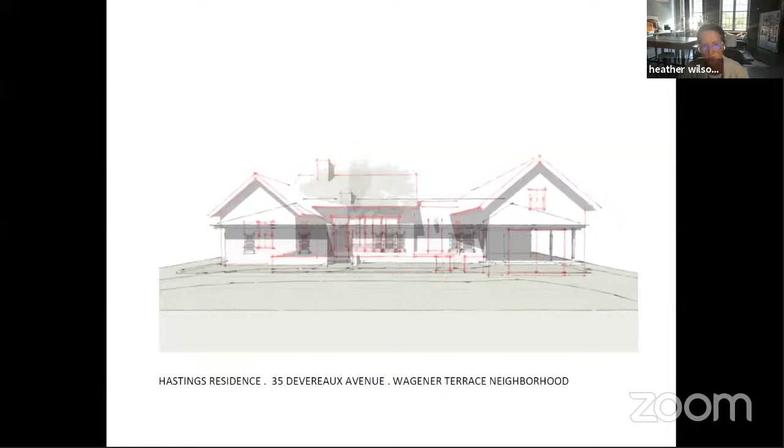I don't want to bore you by reading it, a lot of it I've touched on. But again, going back to that height - if we raise the floor inside, either to give it protection from grade as it is, regardless of flood, we're looking at a 7'9" ceiling height, and lifting that ceiling opens up that frieze and would create a condition where we would need to add brick to a brick wall. So in addition to the complexity structurally, I think architecturally it creates an odd condition of feathering in old brick on top of the existing brick.

And then some other issues which are pointed out in the structural engineer's letter. So I won't bore you with reading that, as I'm sure you have seen it and heard it. So we can keep going.

This is the water. This is, again, what I touched on already. It's in an unusual little island of an X zone adjacent to a V zone on the same property.

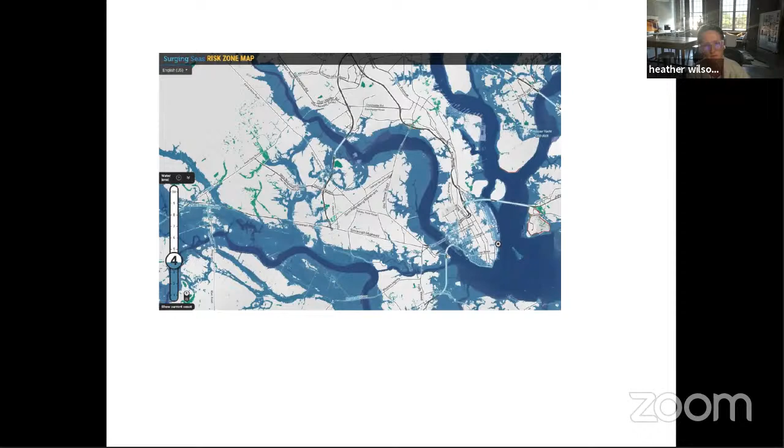You can go through these pretty quickly. This was just indicating what you all know and what we're all up against and struggling with here on the peninsula, so I won't keep going on.

And that's a diagram. That one's probably most material. If you could back up one, Kim, because if you look at the bottom of the existing house, that really shows what we're up against. The orange line in the existing section is what we were trying to achieve in order to protect it from the A zone.

And then the red line on the right is the minimum finish in the middle of the yard. So that kind of tells the story of what we're looking at, and at what point investing in the restoration makes sense. Now, in the proposed section, even though we don't plan to go all the way up, we're just looking for a few feet of protection from groundwater.

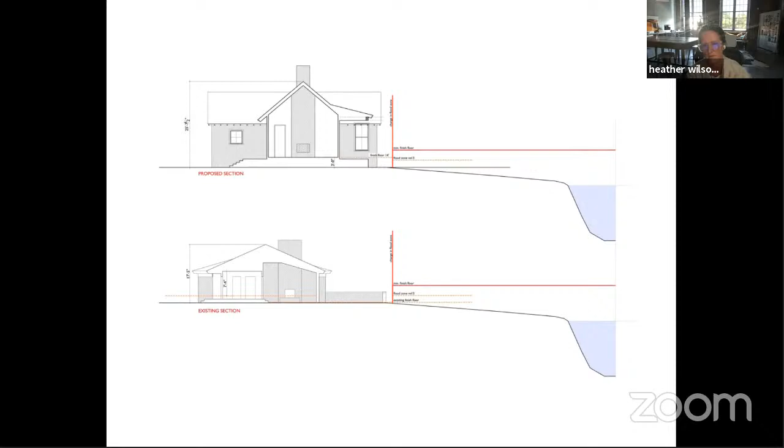These were just some neighborhood context pictures.

These are pictures, and I know you all saw them, so we can move through them, but this was just some of the damage that's happened to the house with the grade and the rain. It's splash, we know, but it's still significant because that is the sill into the finished floor of the house. So there's been a lot of deterioration.

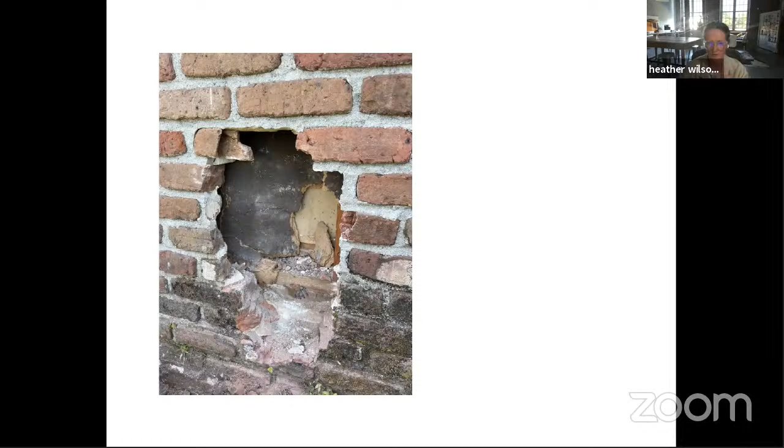That was where we did some excavating to determine the size of the footing, which is referenced in the engineer's letter, and then the sheathing that does not provide the shear, it's crumbling. Engineer's letter.

These were a few pictures just to show the range of homes that are in the area, and I know this isn't really part of your purview, but again, it's what we drew from, and also looking at what is very typical of the neighborhood in terms of the elevation relative to the street.

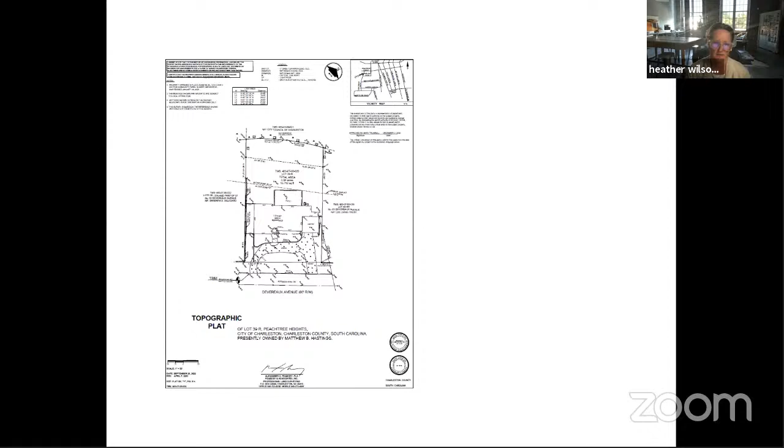Kim, I know you said you had to blaze through those, so that's fine. Heather, you've got about a minute left.

Just to, okay, well, this is how I finished. I was just trying to show that, without mimicking the original home, we are drawing from it in scale and design, and then again, salvaging that brick and reusing it just as they did 52 years ago. We wanted to honor the material and the home in that way.

You could probably leave it on either of those, as they're probably most material to the board's discussion. Those are the existing home.

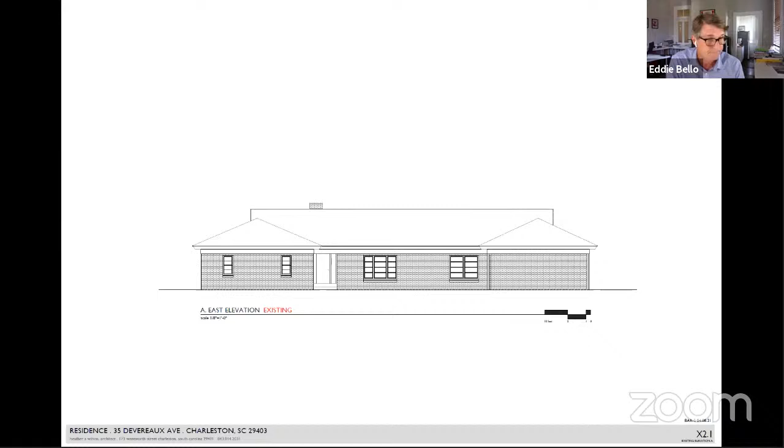Lindsay Van Slambrook. I'm on the fence as well, but leaning towards denial simply because of the cultural significance. And I think it's even perhaps more important in the current climate that we really look at structures like this. I understand that the architect - that may not be his best work - but something just doesn't feel right to me from a cultural significance standpoint, to tear down a house where a prominent African American had lived for many, many years.

And the architect was an African American architect. But I also see that this is not a great example of the architecture of that time, and perhaps the architect himself would say this was not his best work. So I'm struggling here, but leaning towards denial, really for this cultural significance.

This is Bill. I was not able to attend the site meeting this morning, I apologize for that. Like Eddie said, I also had the privilege of knowing Mr. DeCosta. I learned he actually consulted on some projects that I worked on, learned a lot from him. He was able to share some of his history of work in Charleston with a young intern at the time, and I did take a lot of what he said to heart and appreciated his input.

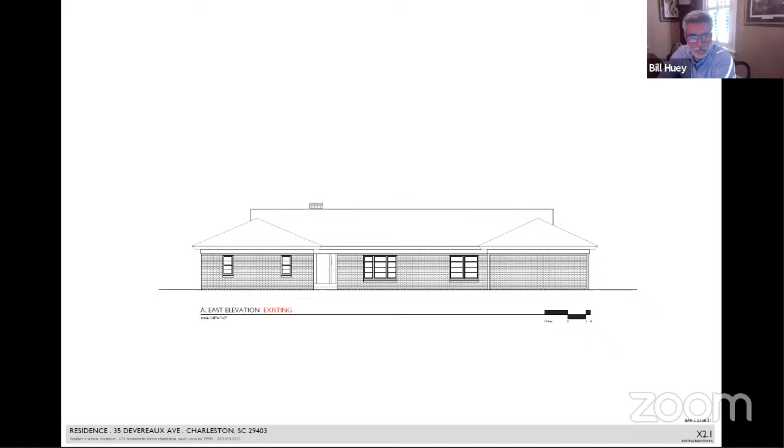My name's Hunter Kennedy, and I think I initially approached this house assuming I was not aware of the cultural value of the property, who built it, who lived there, when we made the site visit, and just judging it on its merits. I did not think it was an outstanding example of modernist architecture on the peninsula. I do think there's some issues in terms of the quality of construction. However, this is a really tough case. I've owned a house built by Herbert DeCosta Sr. I restored it, and I'm aware of his standing historically on this peninsula, what that family meant to architecture here. So I think it's a much more difficult decision.

So I'm considering maybe a deferral would be a better approach from my perspective in terms of making that decision on whether to approve a demolition, because I would need more time to study this.

One factor that I'm weighing is the fact that it is in an X zone. If it were not in an X zone, I think the prospect of elevating it would be pretty far-fetched, but the fact that it's already deemed safe plays into my thinking a little bit.

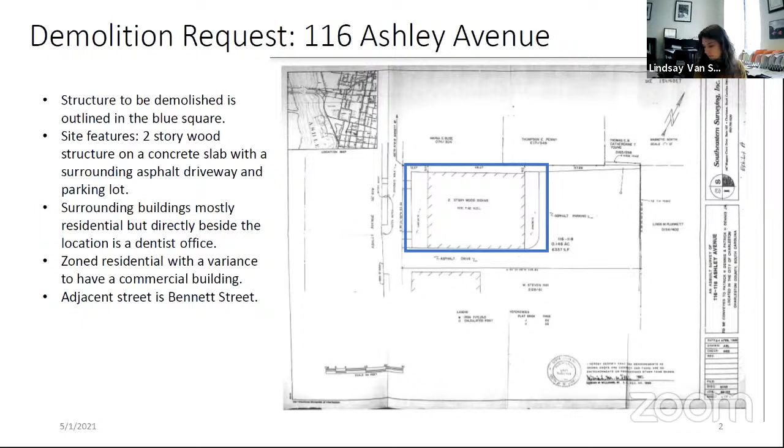As I mentioned earlier, most of the buildings around it, except for the one right next door, are residential homes that have been beautifully renovated. Right next door is another dentist office, zoned residential with a variance to have this commercial structure on it. The adjacent street to this one is Bennett Street. You can go to the next slide, please.

So this is the front elevation of the building. You can see it's quite dilapidated. It was a dentist office for many years, but it hasn't operated in 3 years. It was built in 1967. As I go through some of the other photos, you'll see the drywall has been removed at the base of each room because of previous flooding.

It's our perspective that this architecture does not render the character and charm defined by the traditional architecture of a Charleston residence and the houses around this structure. You can go to the next slide.

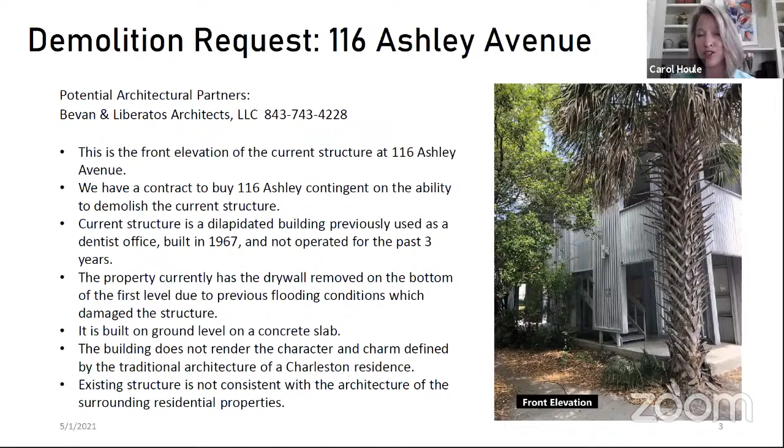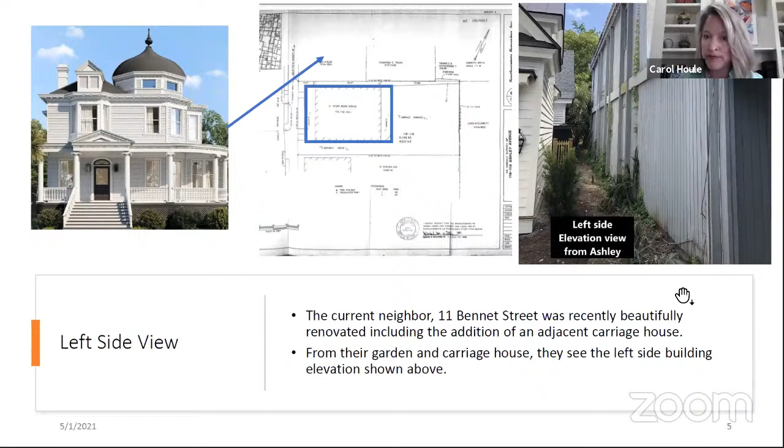So we'll walk down the street as if we were taking a stroll. This is that beautiful house at 11 Bennett that was recently renovated - you can see by the arrow it's right next door. It has a carriage house that was recently built, and a garden, and from their property, that's what they see - that left side elevation view. You can go to the next slide, please.

Walking down the street, this is 117 Ashley, which also has been beautifully renovated. From their front yard, they see the front, and then this right elevation view. You can jump to the next slide.

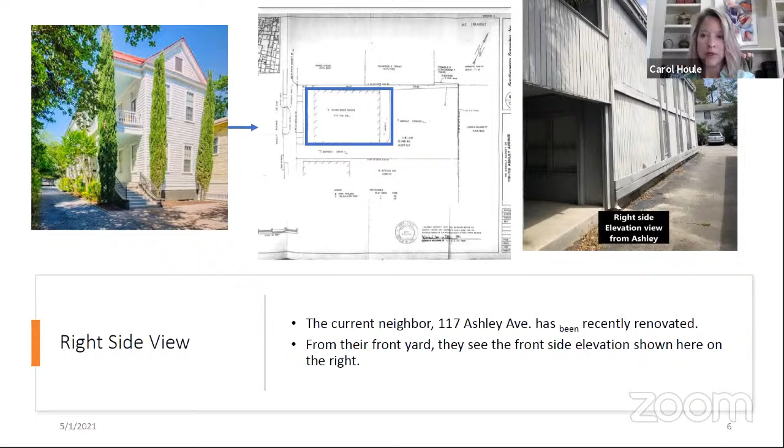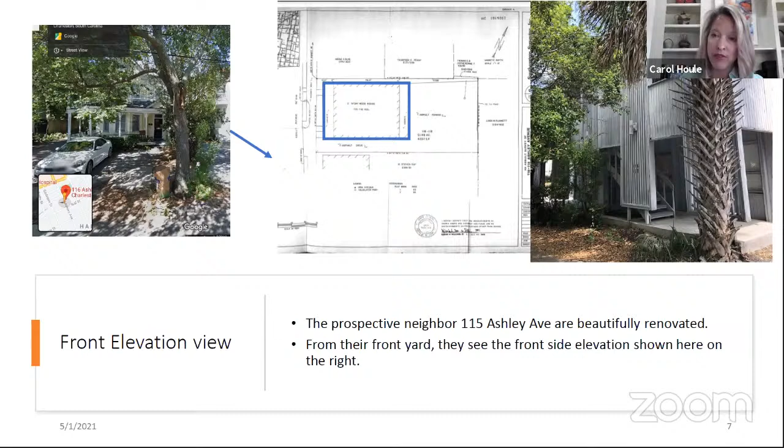Continuing down the street, this is the next house that again has been beautifully renovated. From their front yard, they see that front elevation on the side. Go to the next slide, please.

Again, walking down the street further, this is 113 Ashley, beautifully renovated. Now they don't see this back view, but I just wanted to continue walking you down the street so you can see what's happened in the neighborhood. You can see there on the right-hand side what the building looks like from the rear. We did take a walk, although I didn't include the pictures, around the street of the houses that would be on the backside of 116 Ashley, and it's the same story. They're all really beautifully renovated residential homes.

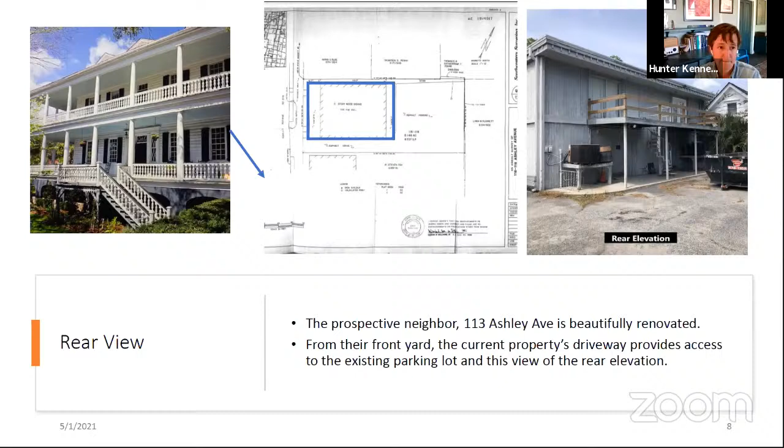Second. All right, we have a motion on the floor for approval. Julia, was that you that seconded? All right, I will put it to a vote. Bill? Yay in favor. Hunter? Hunter, you're on mute. Yay in favor, thank you. Eddie? Yay, but you must salvage the Mac II computer as part of the deal — that cannot be demolished, that is my motion on the floor. I'm checking — yay in favor. Julia? Yay in favor. Chair votes with the majority, and the motion passes unanimously.

Thank you very much for your time. I appreciate it.

Okay, agenda items number 3 and 4, both 60 Meeting Street, have been deferred by staff. Agenda item number 5, 4 Lounge Street, has been withdrawn by staff. So we are on to agenda item number 6, 62 Queen Street. Kim, you'll give your intro. I will, thank you.

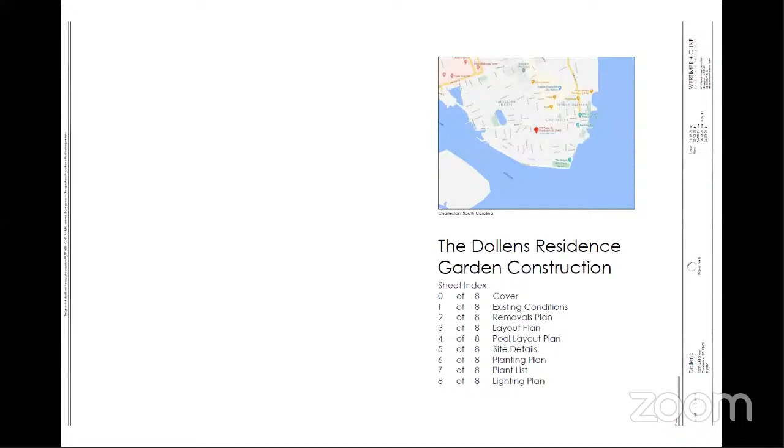We have Madison Rice here presenting. Madison, if you're ready, you have the floor. Can you hear me? Yes, we can hear you. Thanks, Kim. So this is the home of Grant and Sarah Dollens. They have 2 young kids and have asked us to renovate their garden, which would include a new pool and hardscapes.

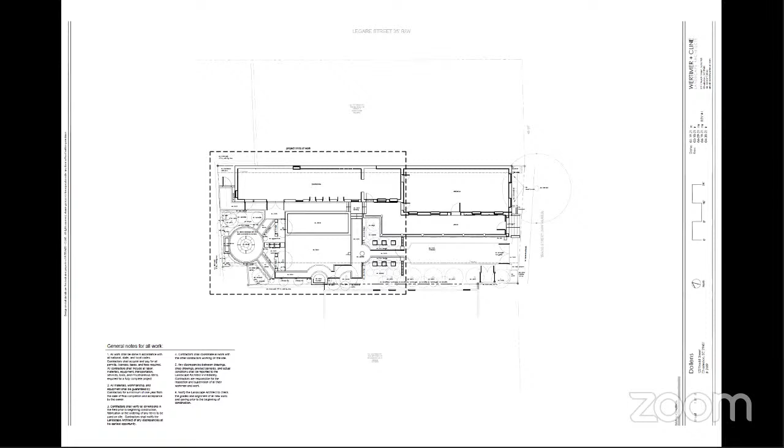There are currently 2 fountains in the existing conditions plan. I can point those out—advance one forward, please. One fountain at the rear is going to remain, but it's going to be relocated to the bottom of your screen in the middle, where that existing fountain is, just to make room for the pool deck.

In order to allow for construction equipment access, we are going to have to remove a brick column and brick coping with a wrought iron fence—just temporarily remove it, and then rebuild it once construction of the garden is complete.

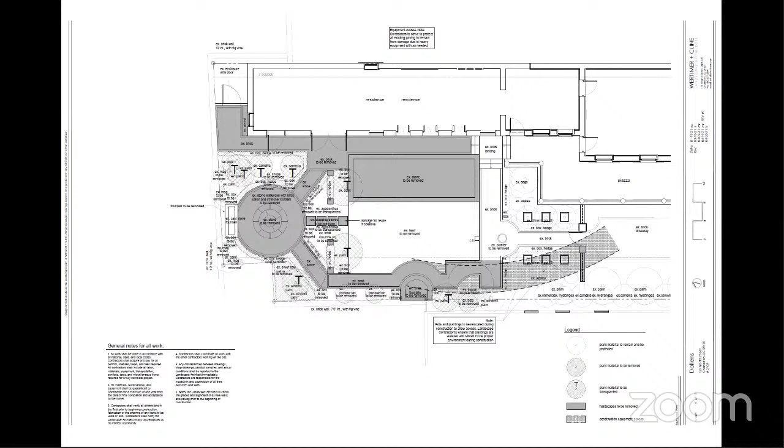And then as far as landscape lighting, we are proposing all path lights and one fountain light. I believe that's all I have, so if there's any questions.

Thank you, Mr. Rice. Do we have any questions from board members at this time? I do have one question, Lindsay—just confirming the wrought iron and wall. I believe Mr. Rice said that was part of the installation in 2014, part of the garden that they designed. Yes, sir, that's original, correct. Okay, thank you. Any other board questions?

All right, we'll move on to public comment. We have April Wood, Historic Charleston Foundation. HCF has an exterior easement at 122 Tradd Street. HCF has reviewed and approved of the proposed alterations to its easement property, and we respectfully recommend approval of this application. Thank you.

Thank you, April. That's all we have for public comment. Kim, if you would give staff comments and recommendations. Since this is a Category 2 building, all modifications must be heard by the board; otherwise, staff would have given a swift approval. We do suggest a dialogue to modify a policy statement to give authority to staff to approve minor adjustments to Category 1 and 2 buildings—conversation for perhaps another time. This proposal is appropriate and modest, and either reconstructing what was previously existing or only moderately visible. So staff is recommending final approval.

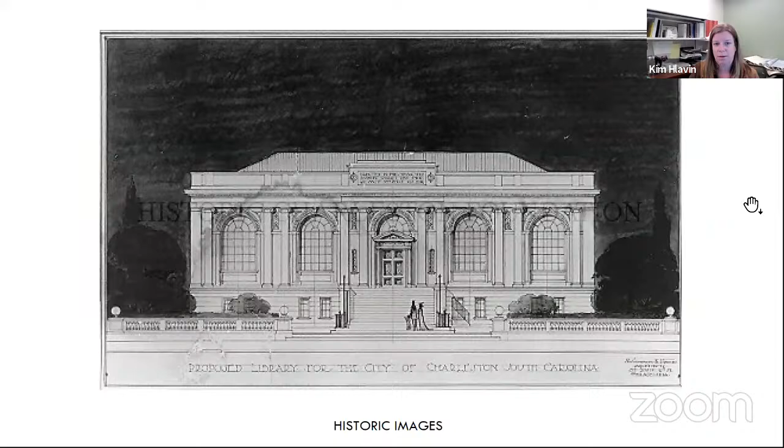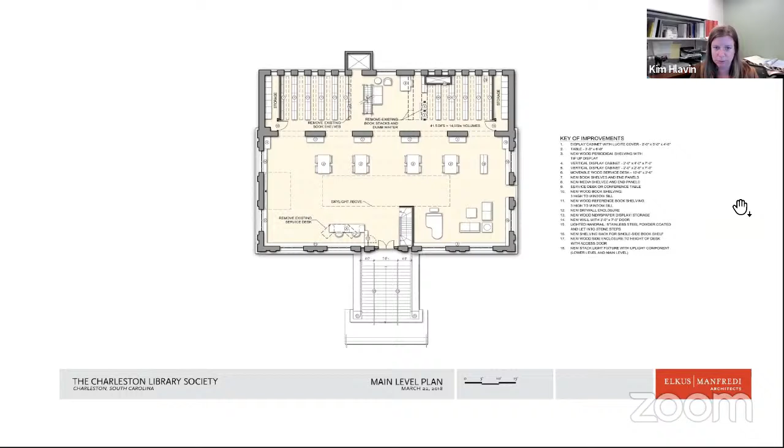Looking north on King and looking south, and some old images. This was from the most recent trip the board made, for the project made in 2018 for window replacement. I figured this drawing might be helpful to show where the marble treads are going, and this one as well.

I'm going to turn it over to James and Dominique Volpe. Mr. Volpe, you're on mute. You are still on mute. All right, here I am. John Smart was actually going to be talking, I was just following the meeting. I don't know if he's out there somewhere. John, you there? Oh, I see him. There we go, Mr. Smart, you're on mute. Mr. Smart, you're still on mute.

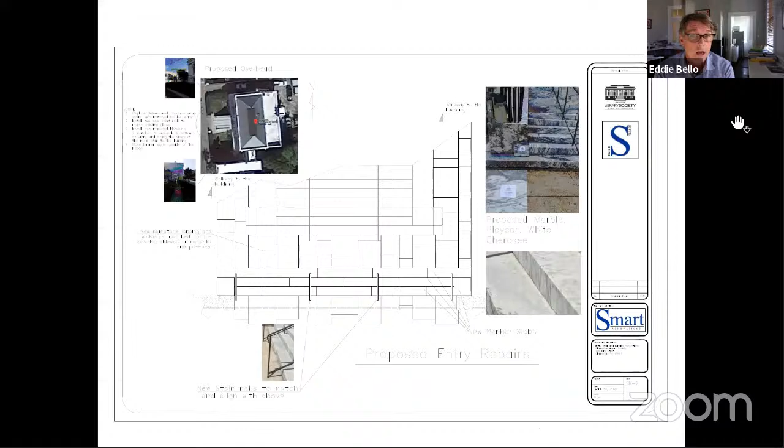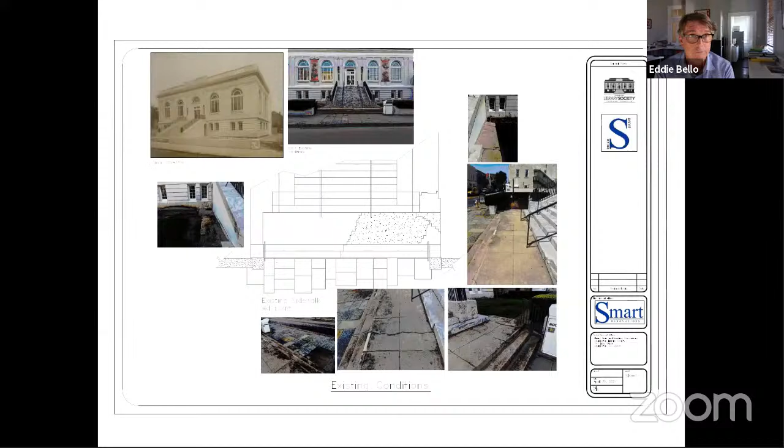I have one comment, and it has to do with why I brought up those railings at the end, at the bottom. Those aren't historic. If you look at the old photographs, those were never there, they were just added, and you don't need pickets per code or anything there. So if the intent is just to have something so people have a handrail to get up the stairs, I would ask that they just match the simple railing design that's in the center of the stairs and put those on either side instead of adding those non-historic ones. I wouldn't want to match something that's not historic and not really needed.

I think it takes away from the elegance of the stairs. I didn't think they were going to match the picket rails. I thought they were going to match the ones in the middle. It's true the picket ones aren't great, so I'd rather not see those again. If those are going back, or he's going to add more to match it, I don't support that.

Maybe the applicant can clarify because it's not on the drawings. I don't see it anywhere. It says in the application, new rails to match existing. I assumed that was without pickets because that would be a waste of money. I agree, so maybe we can just add that to your motion that it would match the center rail design.

Final approval with a condition to match the existing rails on the upper run, no pickets. We have a motion for final approval on the floor with a board condition that they match the upper rail. Julia? Yes, no pickets.

Do you have a second? I'll second it, Eddie. Thank you, Eddie. I'll put it to a vote. Bill? Yay in favor. Hunter? Yay in favor. Julia? Yay in favor. Eddie? Yay in favor. Chair votes with the majority and the motion passes unanimously.

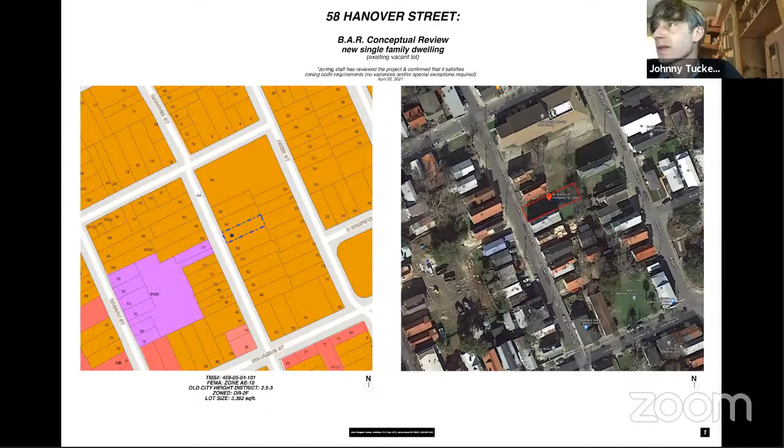So this is an existing vacant lot. As you can see from the tax map image on the left, this lot is very similar to several of the adjacent properties. There's a church at the north end of the block, you'll see that in some of the photos already shown. Next image please, Kim.

These are similar to the photos Kim provided. The top is looking east at the vacant lot, subject property in the middle there. And on the bottom of the sheet is the subject property looking west from the back of the property. Next image, please.

So this is a streetscape, again looking east, showing some sister houses to the south that are nice traditional Charleston single houses, and then some smaller houses to the north. You see the one currently being renovated directly to the north. This shows that we're trying to fit within the height, scale, and mass of the adjacent properties. Next image, please.

This is the streetscape on the west side of the street. You'll see again a nice row of Charleston single houses, and some later, not as successful houses to the south. It's hard to see, but that little red dotted line shows the ghost profile of the proposed house at 58 Hanover. Next image, please.

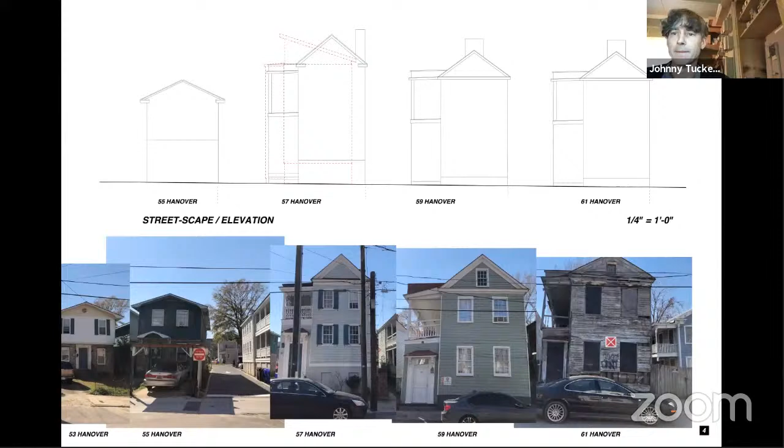It's a simple little single family house, two stories. We're actually elevated because of flood, but not a full story, less than 6 feet. It's a little over 1,700 square feet, 3 bedroom, 3 bath house, with a small roof terrace at the back, which you'll see in the elevations.

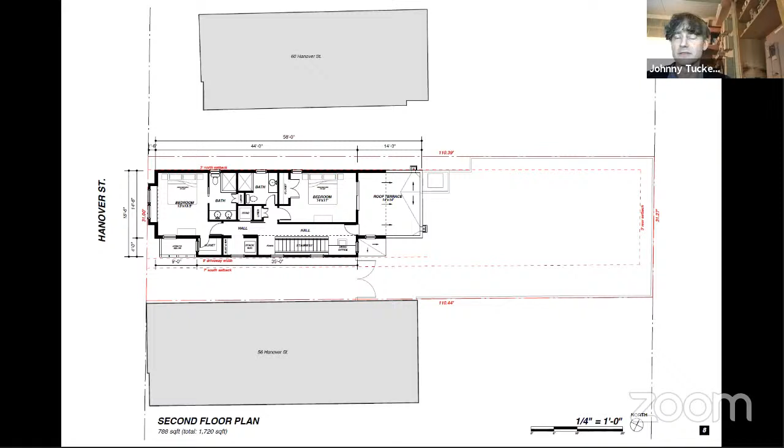Next floor plan is the second floor, which shows the similar footprint, and there's that little roof terrace in the back, which I don't think will be visible from the street, and I've sort of concealed it, as you'll see in the elevations. The next plan is the roof plan, it's sort of self-explanatory. Next slide shows all 4 elevations.

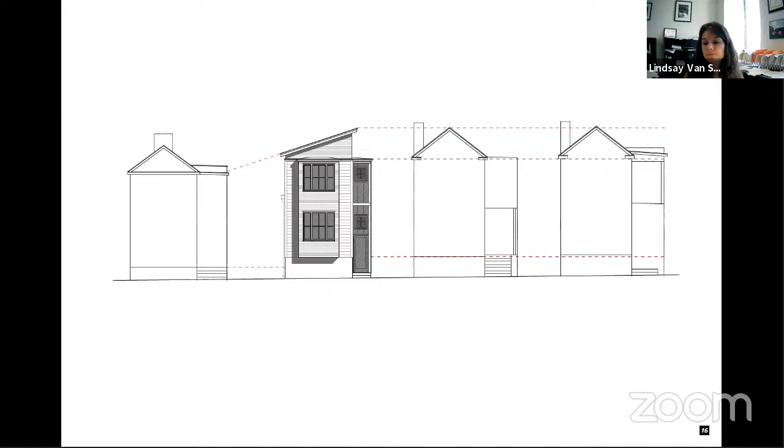Thank you, Mr. Tucker. Do we have any questions from board members at this time? I just had a quick question about the site plan.

Johnny, the cars are shown back in the backyard, is there a reason? Yeah, the owners who aren't here tonight just don't like cars in the side driveway, God bless them. So they want them behind gates, which I'm not showing the design for at the end of the driveway. Actually, I think it's good because the lot's only 30 feet wide, so we're squeezed in with setbacks - 3 foot north setback, 7 foot south, but to have a driveway we need 9 feet. With 9 feet, you're hitting car doors with the house, and the house to the south, 56 Hanover, is right on the property line. So it's nicer if the cars are in the back, because at least the driver can get out. That's why they're parked back there.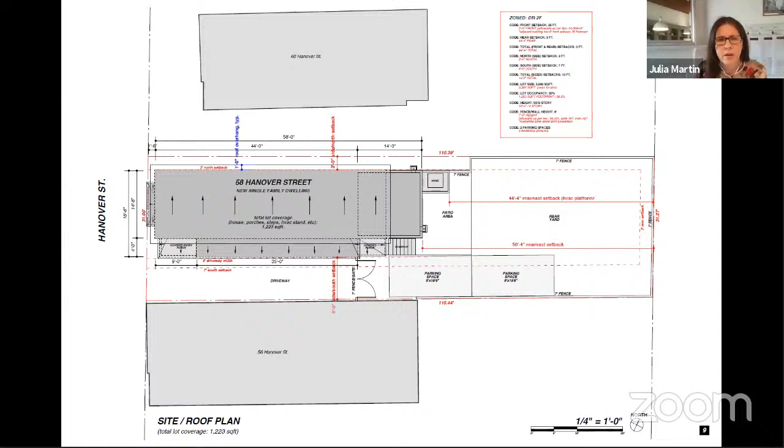Thanks, I'm going to ask one more question. On the front elevation, at that smaller mass - I won't call it a piazza - what we're seeing are just shadow lines, wide open with one horizontal tie-in at the midpoint. Yeah, this is probably, other than the shed roof, definitely unusual. But since it's 4 foot wide, it's not a porch, it's an entry element, and it is covered because that side roof line extends the full width of that side element. The idea was to create a little bit of an unusual space that's covered, but because of the lattice there's a lot of shade on that south wall. So that is what you're seeing - it is a double height space. Thank you.

Any other board questions? All right, we'll move on to public comment.

I think we have Earlene White. Yes, can you hear me? Yes, we can hear you, Ms. White. I sent in a letter as well because I wasn't sure whether or not I could be here.

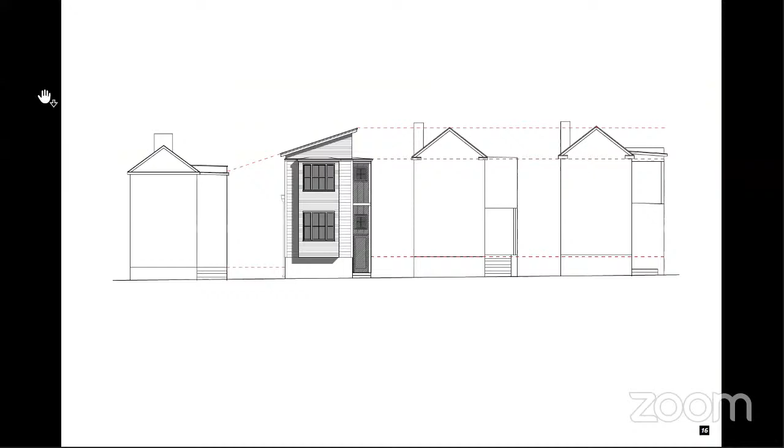But my only concern regarding this structure is the design of the roof. With the exception of a housing unit built in the 70s, all houses on Hanover Street between Columbus and Line Streets have the A-shaped designed roof. In addition, the majority have tin roofs. The lot at 58 Hanover Street is next to my house and in close proximity to 3 more 2-story houses that complement one another and maintain the A roof style. I sent some photos by email, but he had already shown you the south side pictures, and you would see how those houses are designed with that A-shaped roof. The house that was previously on the lot at 58 Hanover was also built with that A design to complement the area. I would like the owner to consider building the house with the A angled roof design so that it conforms to the traditional style and preserves a sense of history that we are accustomed to and proud of. Incidentally, those adjacent houses on that side of the street were all built in the 1850s, so they all really complement one another. Thank you.

Thank you, Ms. White. And for the benefit of the board, Ms. White is right next door at 56 Hanover Street.

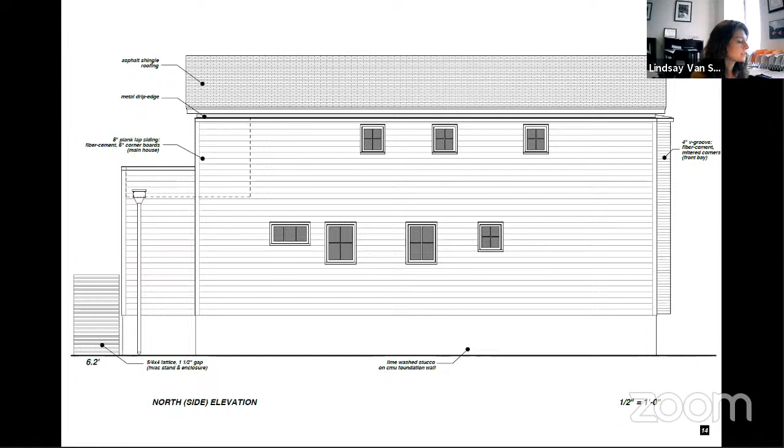All right, and we have another letter from Gail L. Lincoln: I'm concerned about the design of the roof of the structure proposed to be built at 58 Hanover Street, next to my home at 56 Hanover Street. All the houses on the same side of the street have an A-shaped design roof, which has always given a cohesive, attractive old character to the street, admired for years. I would hate to see that character taken away. I would like the owners to consider proposing a house with an A-shaped design roof, which would contribute to the character of the street as they join us as neighbors. Thank you, Gail L. Lincoln, also at 56 Hanover Street. And that is all we have for public comment.

Move on to Kim, if you'll give city comment and recommendation.

Typically, a shed roof includes additional clerestory windows to allow the entry of light. If it sheds to the south instead of the north, it has the potential for solar collectors, but that might be the only positive of this roof line, which should be restudied. The mass that simulates an enclosed piazza is inappropriate and should be restudied. The fenestration is orderly except for the north elevation; align windows with more consistency. The height, scale and mass is appropriate, but general architectural direction needs refinement. So we are recommending deferral for our general architectural direction, with staff comments noted. Thank you.

Thank you, Kim. Mr. Tucker, did you want to respond to any of the public comment or staff comment?

I will say the owners did present the project to the East Side Community Development Corporation, I think is the name of the neighborhood association. I believe I was not able to attend that meeting. I believe the question of Mrs. White next door was brought up at the meeting.

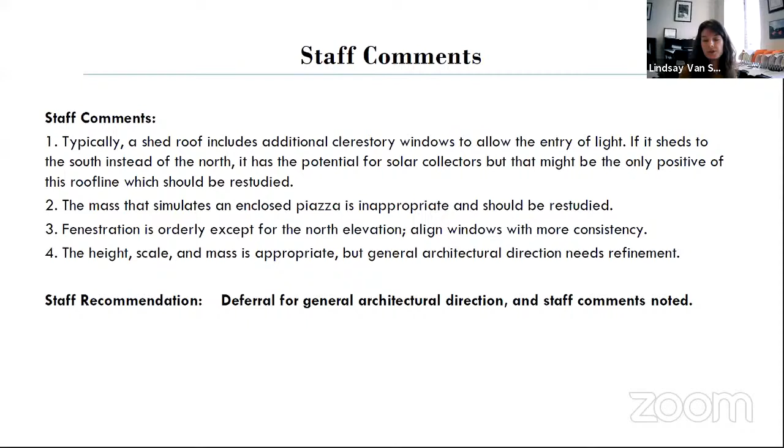I can start if no one else wants to. I have no issue with the general aesthetic that is more contemporary. I don't really have a problem with the single pitch roof, although I think the architect could probably achieve similar goals even with a regular pitched, gabled roof. I'm a little conflicted about the wide open, extremely vertical nature of the front of the entry area, but I don't have any major problem with there being a larger mass and a smaller mass. I don't think it's necessarily in violation of something critical to Charleston. I think it serves a lot of purposes. And I do appreciate how the architect has integrated that rear roof deck into the geometry so that it's not overly noticeable or distracting. I think that's about all I've got.

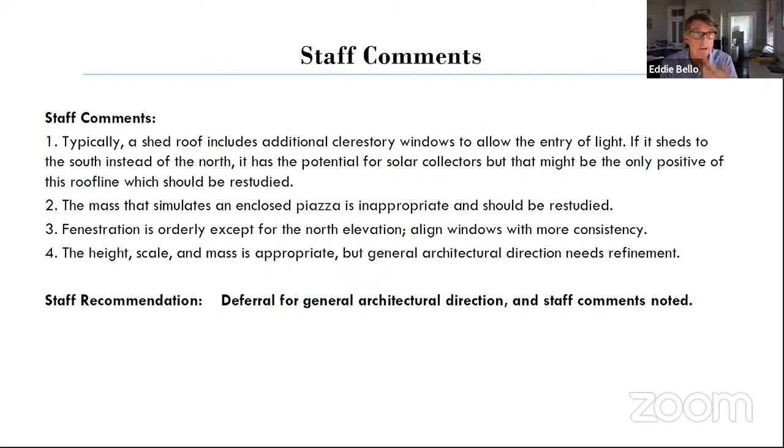Well, I'll add a couple things. I agree with what you said, Julia. I'm not opposed to the shed roof either. I do think part of the issue is like staff brought up — the pitch has to be what it is, I'm guessing it's as low as you can go because you're using shingles, but you end up with just a blank space at the high portion, and that's not as strong as it could be. So I don't know what you do with that, but I can see that being an issue, and I kind of agree with staff on it. The only way to solve that would be to lower the pitch or lower the bearing height on the low side so it comes down and is more integrated with the building. I don't know, Mr. Tucker could figure it out, but I can see where that's a bit of an issue. I don't have a problem with the narrow entry — it's not a piazza, so I think all that's fine.

I like the lattice. This is more of a preliminary comment, but just having a single piece of wood over 6x6 posts, I think that could use a little more development since it's the front of the house — it could be a little better detailed as you get into it. The only other comment I had is, can you show the south elevation, the next slide?

I don't think personally you need to have 3 different types of siding on this little house. I think it would be stronger if instead of board and batten, you just went with that 4-inch V groove in this bay area. Then it would tie in, and if done thoughtfully, that same size could extend to your lattice, so it ties in somehow. To me, one more material on such a little house takes away.

I think it ought to be nice and simple, so I would just suggest that. You don't have to agree, I just think it would be better. But I kind of agree that right now the roof, I'm not opposed to it, but it doesn't seem to be working as well as it could with the overall proportions. So I would think that might want to be restudied.

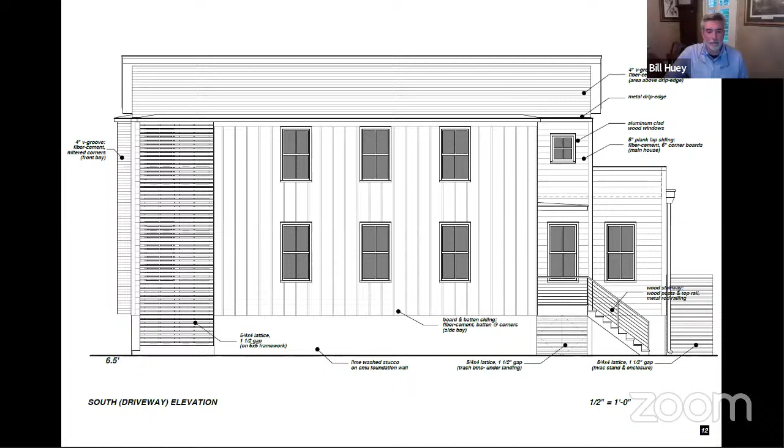Do I have a second for Julia's motion? I'll second, Eddie is going to second. Thank you, Eddie. Put it to a vote. Bill? Yay in favor. Hunter? Yay in favor. Julia? Yay in favor. Eddie? Yay in favor. Chair votes with the majority and the motion passes unanimously.

Thank you, Mr. Tucker. Moving on to agenda item number 10, 17.5 Hanover Street. Kim, we'll give an intro.

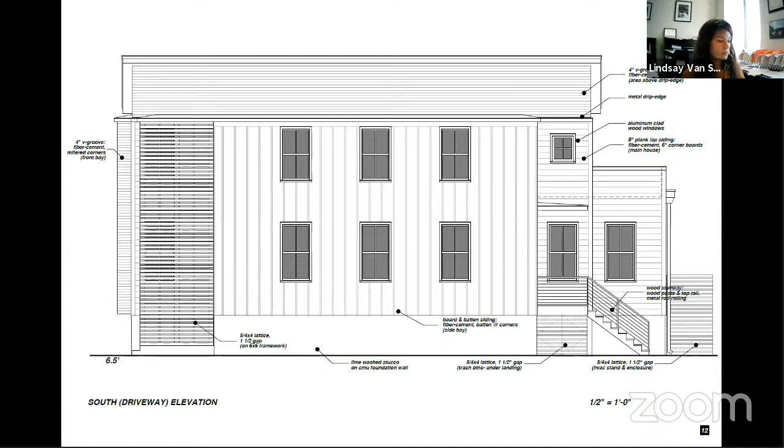Thank you. Just bear with me for a moment. All right, excuse me.

17.5 Hanover Street is requesting final approval for modifications and renovations. The building's a category 4 in the East Side neighborhood, constructed in 1913 and in the old city district. Here's an aerial showing the building right here.

Here's some existing site photos, a couple different angles. This is looking south on Hanover, looking north. And these are the Sanborn maps from 1902 and 1944.

Just going through the motions to find the age that it was constructed. There's a mention in the News and Courier for a bathroom addition by owner Ava Mccarthy in 1915, and earlier there's an unknown address, but by Ava Mccarthy for new construction of a 2-story wood building in 1902.

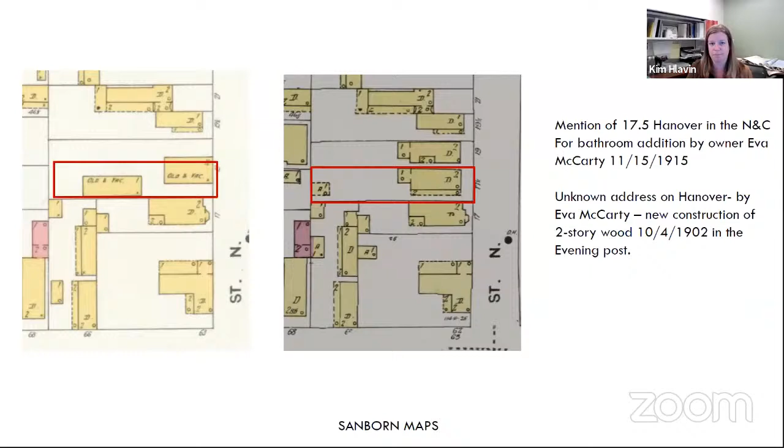On April 8th, 2021, the conceptual approval with staff comments was the motion. I'm not going to read these staff comments unless you want me to.

But with that, I'll turn it over to the applicant, Mr. Byron Geddings and Eddie Bines.

Good afternoon, my name is Byron Geddings. Thank you for hearing us. I want to start with a little personal privilege. I thought you all gave in-depth consideration to 35 Devereaux Avenue. Mr. DaCosta was very close with my parents and close with me, and encouraged me to become an architect. I appreciate the thoroughness you all deliberated to get through that. As a last mention, Mr. Bello, Mr. Kennedy, and Mr. Huey, I appreciate this. Mr. DaCosta used to always tell me, Byron, I almost married your aunt when I was at Avery. So anyway, that's enough said, and we'll go on and talk about our project.

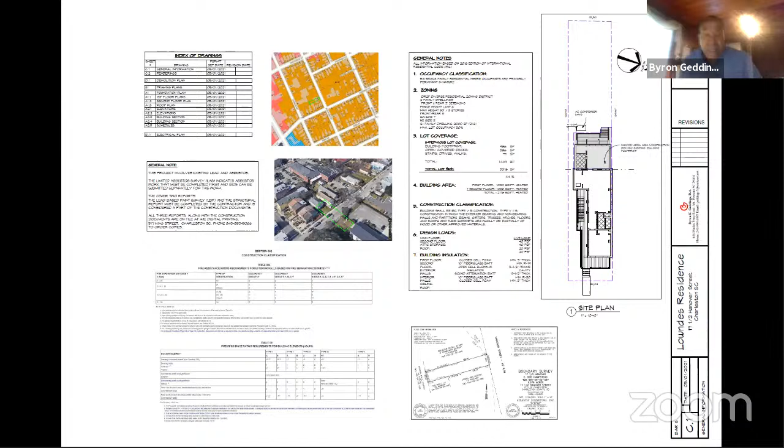We would like to start with the second drawing, please. The comments generated at the last meeting led us to add the additional columns requested to the front elevation of the structure.

We also went ahead and balanced the column spacing on the piazza on the left side. We also adhered to your comments requesting to retain the original building walls as much as possible. So we had a wall that we had removed, but we put it back as requested by the board.

We incorporated the wood railings and balustrade for the piazza railings and stairs, and followed through with introducing a hip roof over the second floor front porch.

The other change we incorporated was regarding the rear of the building. In our last meeting it may have been a little misunderstood, but after the piazza, that area that protrudes out, that's an addition to the house. I was told by the owner it was done around the 1970s. I just wanted to note that that is an addition. Our proposed addition, we have recessed it behind that to reflect that it's not part of the original building. However, I think it works overall with the structure.

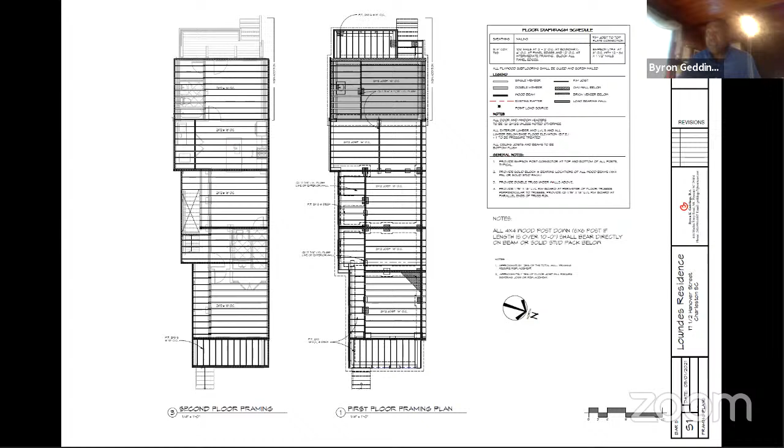If you, Kim, could go to slide number 5 and 6 -- this one is perfect -- you can see the impact on the floor plan where we retained the existing historic wall. As you walk down the left piazza and approach the entry door, after the entry door we retained the wall that used to be there. So this is showing the impact it's had on the floor plan. It made the living room a little bit smaller, but we respect the need to keep the historic significance of the original structure.

Going back to slide number 2, we changed back and eliminated the PVC, incorporating wood trim and HardiePlank siding. I'm learning now there may be some issue with the HardiePlank. If so, we're open to changing it to wood siding. Underneath some of the building there is old wood siding, not over the entire building, but underneath the existing vinyl there is some. It appears to be a 1x5 novelty siding pattern. I can find 1x6 novelty at Southern Lumber, but not a 1x5, so we'd have to find that if we go back to it.

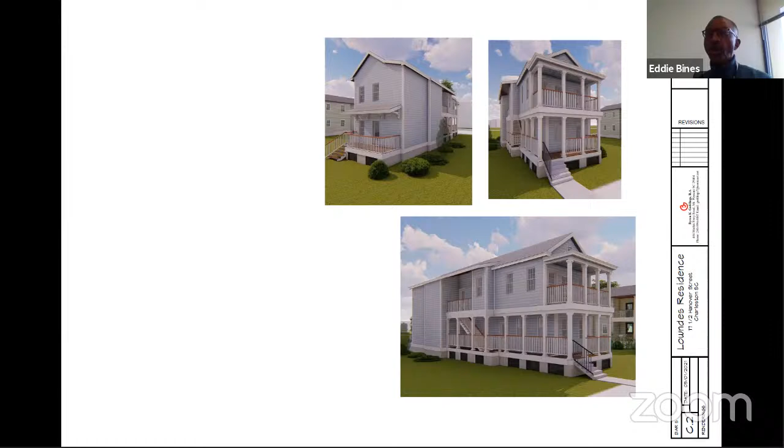And we appreciate all the work you do. I'm glad to see Mr. Bello, I hadn't seen him in a while. And also Ms. Martin, I hadn't seen her in a while. But anyway, that's just why I waited around this afternoon so I'd have a chance to speak to this group. I apologize if my voice sounds hoarse, but it's because I've been enclosed in meetings all day. So thank you very much, and I appreciate this opportunity.

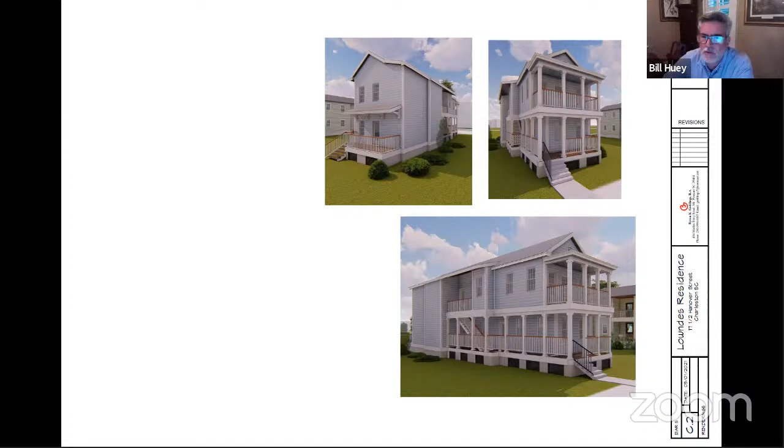This is Bill. I just have one very quick question for Mr. Geddings, it might just be a graphic thing. I'm trying to understand the heights of the railings that we're seeing. They just look kind of tall graphically on this rendering, but it may just be an optical illusion.

Yes, I would definitely say it's an optical illusion. The code requirement is, I believe, 40 inches, and that's my intent to have them at that height. I think we can go to 36 on residential, so that's why it might have struck me a little bit high. Okay, they're shown at 40, I could drop them down to 36.

Thanks, good eye, Bill. Good eye. And it's a 2-inch gap at the bottom too, by the way, just to let you know. I don't know what they think's gonna squeeze under there, but anyway, it looks great. Thanks for your work. Thank you. Good.

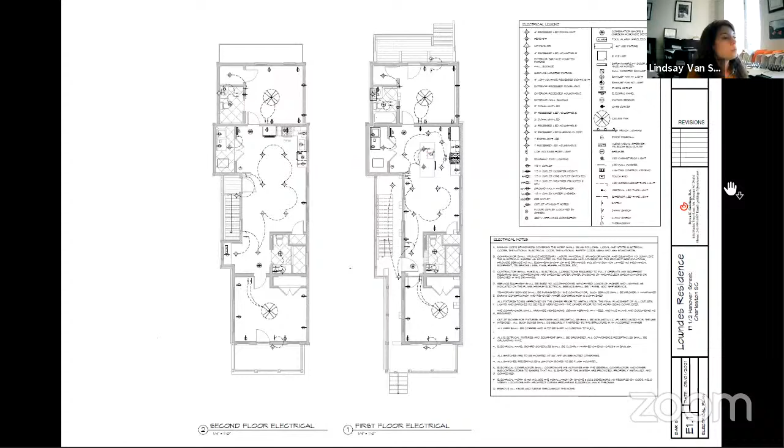Attention BARS, May 13th, agenda item number 10, 17.5 Hanover Street. My name is Reverend Matthew Rivers, pastor of St. John's Chapel. I wanted to just say that I am in full support of the renovation at 17.5 Hanover Street. Thanks, Reverend Matthew Rivers, and that is it for public comment.

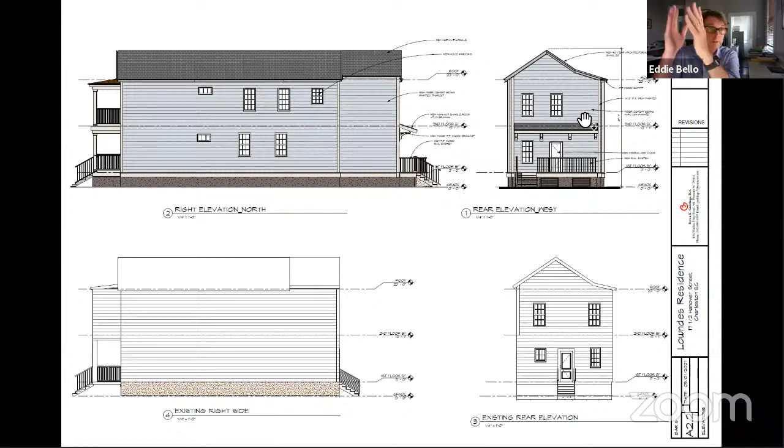But I think the project's great. My only comment is for Mr. Geddings - if you'd look at how the front porch is detailed, this isn't going to cost anything. Right now I just looked at the details, and the beam is off center from the porch column, and then at the top it's off center too. I think if you just go and study, look across the street at another piazza and see how that column and beam relationship works, that'll make a huge difference - it ain't going to cost anything, it's just where you locate it.

Yeah, look at this right here. See how that detail is? Yes, it's an easy thing to fix. That should be centered on the column, should be centered on that beam. And then the transition there from first to second floor is easy, just pull that back a little bit. So to me, it's just adjusting that detail, and it'll make all the difference in the world when you walk up to that porch. And that doesn't add any cost, it's just fine tuning the detail.

And then if you look at the front elevation, there's a column that comes down and there's no pier underneath it. So if you could put a pier underneath it - like the next one, see that one right there next to the stairs? I would just put a pier there and let the stairs die into that pier. Again, simple stuff, but I think it will make a big difference as it presents itself on the street. So those are my only comments, I think it looks great. And I agree with staff about the cementitious siding, that it should be wood.

This is Bill. I'd say I agree with those comments from Eddie, and I would think those are minor - staff could review those. So if everybody's okay, I'll make a motion for final approval with staff's comments and final review by staff. Second. Okay, we have a motion on the floor with final approval with staff comments and final review by staff, and a second from Julia. I'll put it to a vote. Eddie? Yay, in approval. Hunter? Yay in favor. Bill? Yay in favor. Julia? Yay in favor. Chair votes with the majority, and the motion passes unanimously.

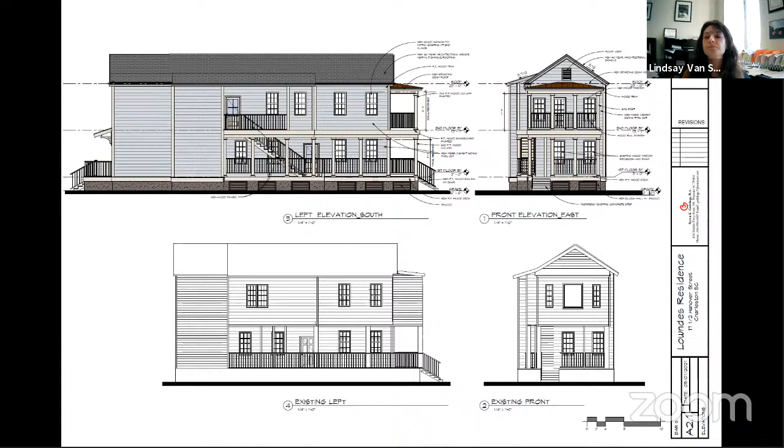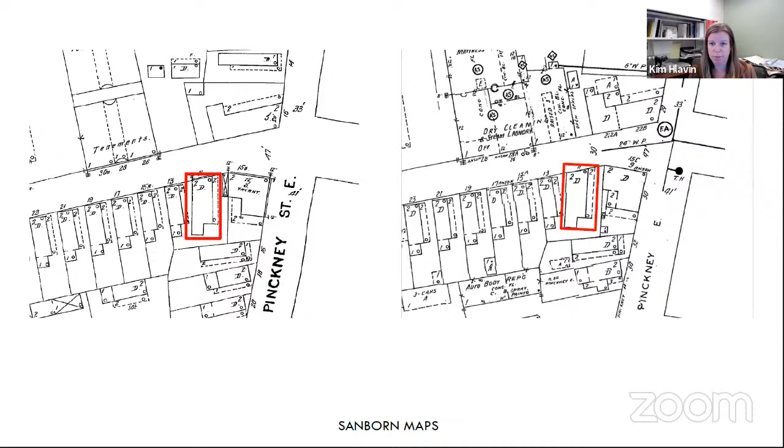Kim: Thank you. 11 Anson Street is requesting new construction of a two-story addition at the rear and to the south of the existing residence. It's a category 3 or 4, maybe, in the Ansonboro neighborhood, circa 1889, and in the old and historic district. Here's an aerial for you to familiarize yourself with the location - it's near the intersection of Anson and Pinckney. And just a couple images of the existing streetscape: this is looking down the driveway, looking south on Anson and looking north on Anson. Sanborn maps from 1902 and 1944 show the building unchanged.

And we have Mr. Glenn Keyes, and I'll turn it over to him. You have the floor whenever you're ready to speak. Great, thank you, Kim. Can you put up the first slide, please? Okay, so this is a very small house in Ansonboro. Next slide, please.

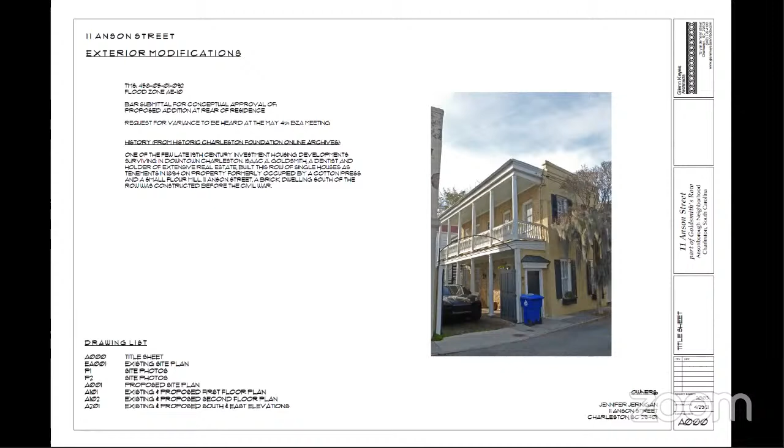It's the existing conditions of the house, with just two rooms with a dependency attached on the west side. Next slide.

So in the bottom left, you can see where the addition would be tucked behind the existing piazza. On the right side you can see that at one point in time there was a shallow porch on this dependency, which was lost long ago. And we're proposing to put this addition in front of that dependency and tucked behind the existing piazza. Next slide.

You can see an addition of a sunroom on the first floor that sets back behind the column line of the loggia. The addition will be minimally, if at all, visible from Anson Street through and behind the piazza. From Pinckney Street, it's 48 feet from Pinckney Street to the face of this sunroom, and it's overlooking a wooden fence and a masonry wall, so it would be a limited view from that side as well. Next slide.

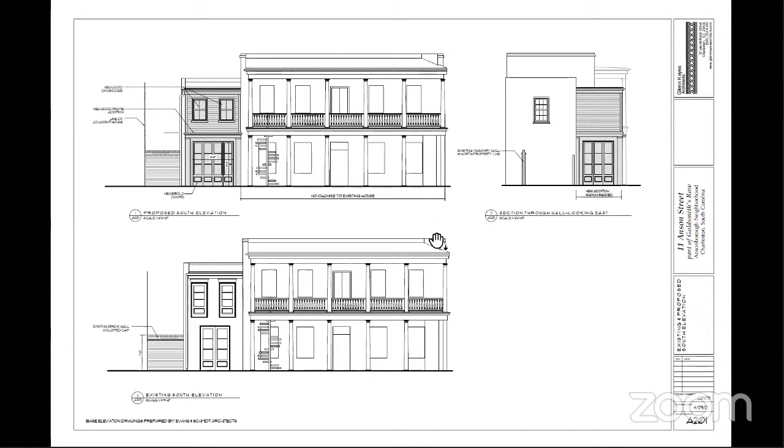This is the back. The other question is, I saw that the wood gates are going away and there will be wrought iron gates, which I assume are fairly transparent. Do we have any drawings for that? That has not been determined. That will come with the landscape architect, who will be handling the site and the gates. It's not clear whether those gates will be iron or retained as wood.

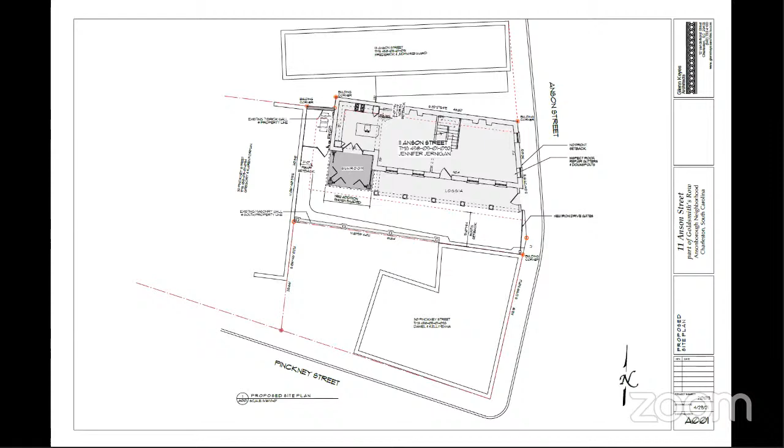Okay, thank you. But regardless, if you look at the photograph, Kim, go back to the first sheet with the photograph down the driveway. One more, in the middle one, Eddie. I think you have a delay, or I have a delay. Yeah, I mean, I went by there, so I know the house. I just don't really have a good feel for what this is going to look like from this, I guess, east elevation, without a drawing.

Can I interrupt for just a moment? In September, I think, they had approval pending, with issues resolved for the rear, for this gate here. BAR Small gave them approval for this configuration after their rear issues are taken care of. With the potential approval of this, the rear issues will be expunged.

Okay, if we can go back to that photograph of the front, please. Sorry, I was not aware that this had been approved. But as you can see, Mr. Bello, we can certainly draw this elevation, but everything happens back of the piazza column line. So anything seen would be pretty minimal, I think, with the perspective, even with iron gates there. And it's glass on the ground floor, essentially a glass sunroom. So we can certainly provide more information, and that would be helpful. Okay, thank you, Glenn.

Any other board questions at this time? This is Bill. I guess I have a question of staff — my recollection is getting worse as I get older, but I thought I remembered at one point an application on this home to use some Philip Simmons gates that were found somewhere online, that they were going to use and put here. I'll open it up again.

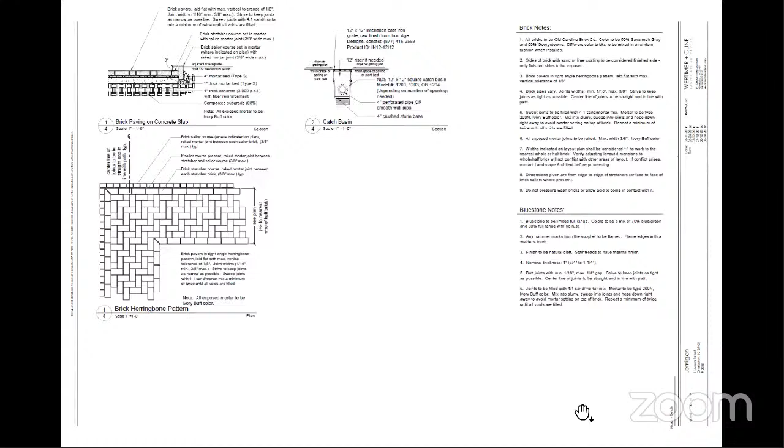This is Kim. Yes, this is the gate that the owner has decided to use. I just got a text from the owner — she said those gates are no longer available, they've been purchased by someone else in Mount Pleasant. So there'll be a new design coming to you from Ms. Wertimer.

Any other board questions at this time? Okay, we will move on to public comment. We have Erin Minnigan. Thank you — Erin Minnigan with the Preservation Society of Charleston.

We would like to thank the applicant for being in communication and walking us through the proposal. We are somewhat disappointed to see the change in approach from the previously approved design from, I believe, 2018, which restored the former porch and its footprint as seen on the Sanborn maps. However, we understand the current proposal is driven by zoning constraints and there are similar additions in the area. Given the most visible portion of the addition will be the second floor from Pinckney Street, we would encourage the upper floor to become more transparent and incorporate more glazing similar to the first floor, to better reflect the porch that once existed in this location. Thank you.

Thank you, Erin. I think that's all we have for members of the public speaking, and I have a couple of letters here. The first is from James A. Rice at 62 Society Street.

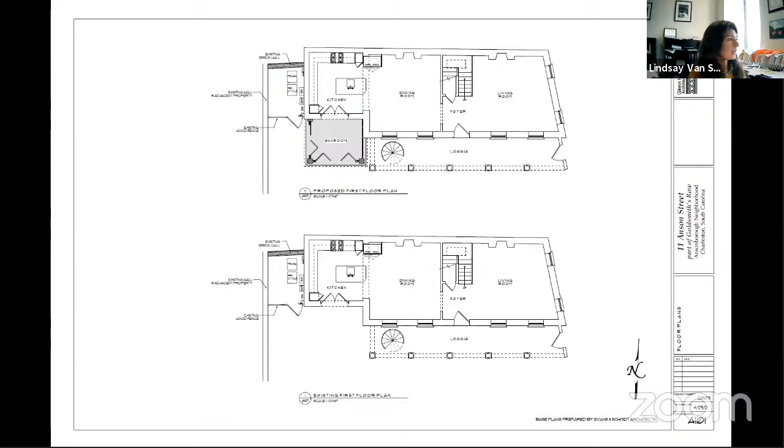And that is it for public comment. Kim, if you'll give city staff comments and recommendations, please.

Thank you. The site has a history of non-compliance, which has to do with the rear portion. If this proposal should be denied, the owner should be required to complete the after-the-fact repairs. That said, this house is small and on a small lot. There are examples of similar around the corner on Pinckney Street, which further extend over the driveway. Siding on the second floor should be more subtle, nickel gap siding or shiplap. And lastly, the east elevation should be included in the next submittal. Staff's recommending conceptual approval with final review by staff.

Thank you. Thank you, Kim. Mr. Keys, did you want to respond or clarify anything with respect to the public or staff comments? No, I'm fine. Thank you. Thank you, Mr. Keys. I'll open it up for board discussion and a vote at this point.

All right, well, I'll start. I think it helps me a lot knowing that there was a porch back there, and it would be helpful to know if this is extending further into that former footprint. I guess it is. And given Mr. Keys' long history, I'm not overly concerned, but it is kind of hard to want to approve something when I don't know what it looks like.

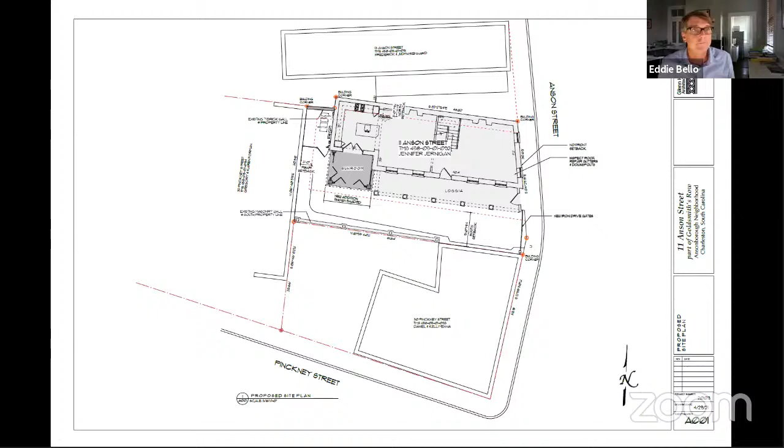Hunter? Yes, in favor. Bill? Yay, in favor. Julia? Yay, in favor. Eddie? Yay, in favor. Chair votes with the majority and motion passes unanimously. Thank you, Mr. Keyes.

Moving on to the final agenda item tonight, since agenda item number 15 was withdrawn by staff. We are on agenda item number 14, 157 Wentworth, Unit E. Kim?

157 Wentworth is requesting conceptual approval for new construction of a 2.5-story house. It's in the Harleston Village and in the Old and Historic District. Some context: it's on the south side of the street near Colonial Lake. This is looking at the rear of the property - you can see another structure built right next to where this is going to be. So this is the property here, and you can see the red rear shed roof.

Here's some images of the house from the street. This is looking east on Wentworth, and this is looking west. Excuse me, looking west - no, sorry, this is looking east. And here are some historic images. Actually this one is from 1996, so I don't know if we'd call that historic.

But if Mr. Stevenson and Mr. Romano want to take it from here. Hey guys, I am Tara Romano with Neil Stevenson Architects.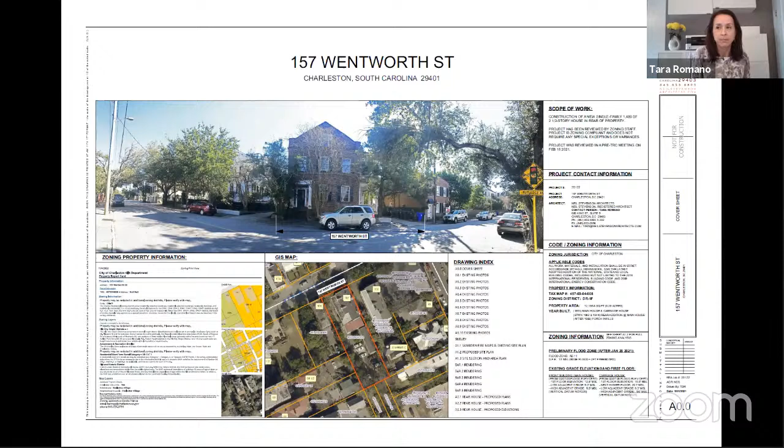Flipping through a couple of the next pictures to show this overview - that main house at the front currently has 4 units, and the carriage house currently has 2 units. And then you can see there's a pretty large area left over at the rear of the property. You can flip to the next one, and the next one.

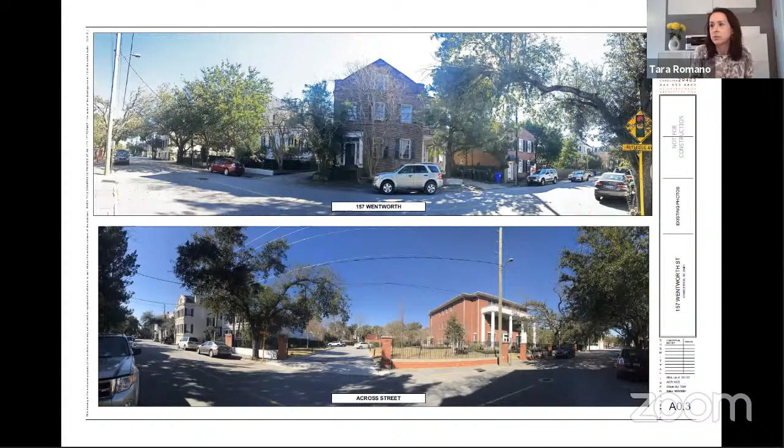You can see here's the street view. You have a small commercial building to the right and another 3-story residential structure to the left. Then across the street you have Fisher House, I think that's what it's called, and there's a parking lot directly across the street and a few other houses off towards the left. Next slide.

So this property has been left derelict and the structures have been neglected for many years. It's been an unpleasant sight for the neighbors and they've let us know many times. The new owner wishes to bring the historic buildings back to life. He's planning to repoint the brick, repair the shutters, remove the window AC units, and repair historic exterior details. The interiors are grand and have much of the original historic fabric, including the original flooring and woodwork. It'll take a lot of work, but the owner is excited to bring this property back to life.

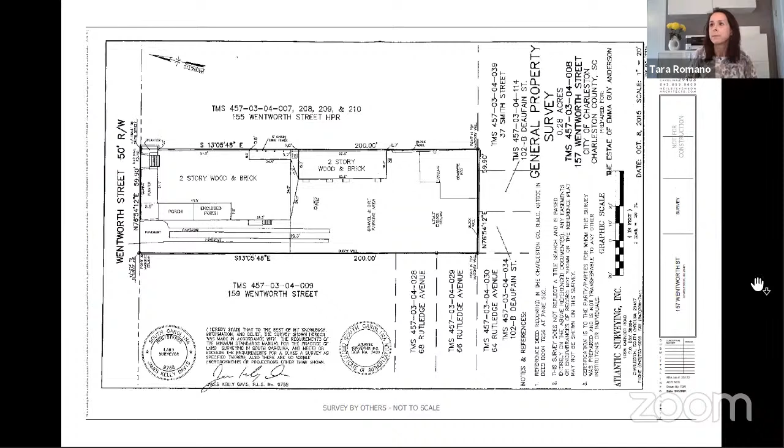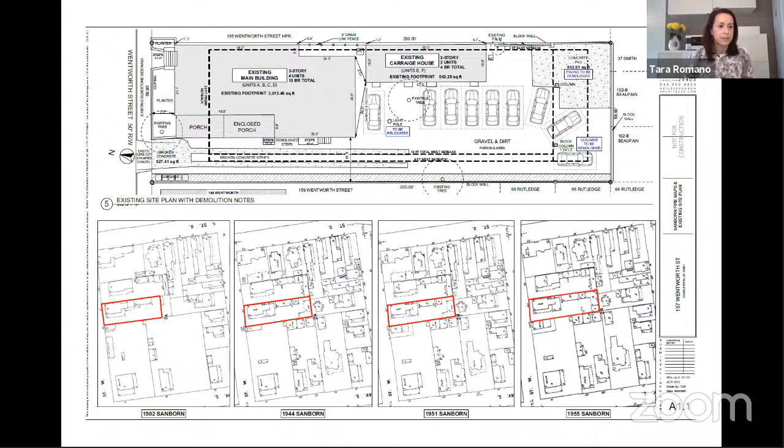The layout complies with all the zoning requirements. And again, the owner is reducing from 6 units to 5. Next slide.

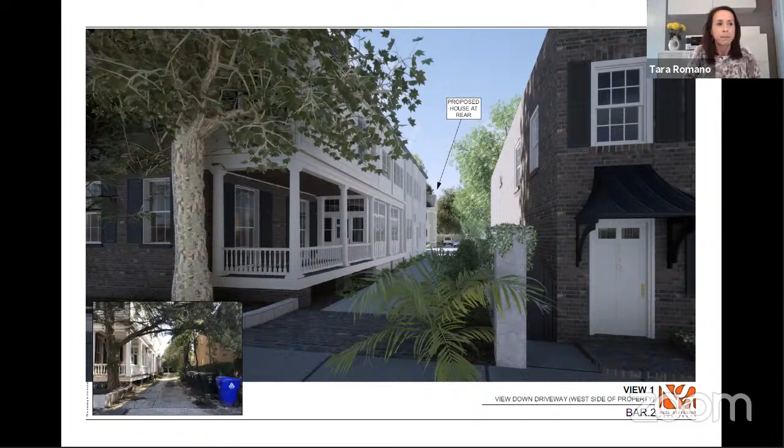This is the view from the neighbor's driveway on the left. It's pretty far back there, and this view is also mainly blocked by the carriage house. You can also see that the rear house of the neighboring property is higher than this new house.

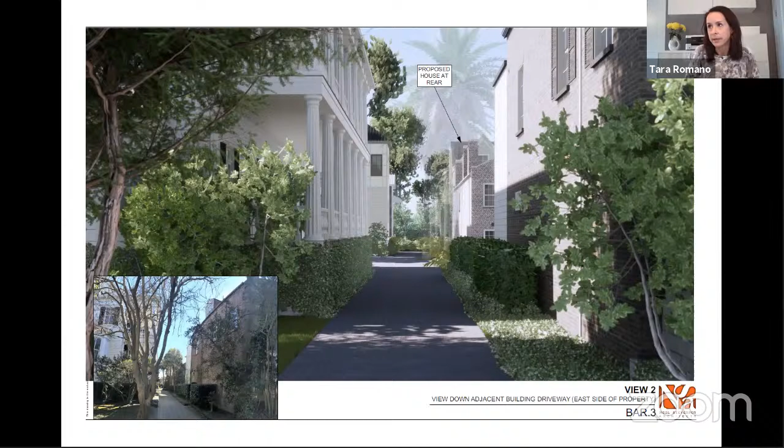Ms. Romano, we're over time. Can I get 30 more seconds? Yeah, okay, sorry. This is not actually a BAR right-of-way, but in discussions with staff they thought it'd be helpful to show that.

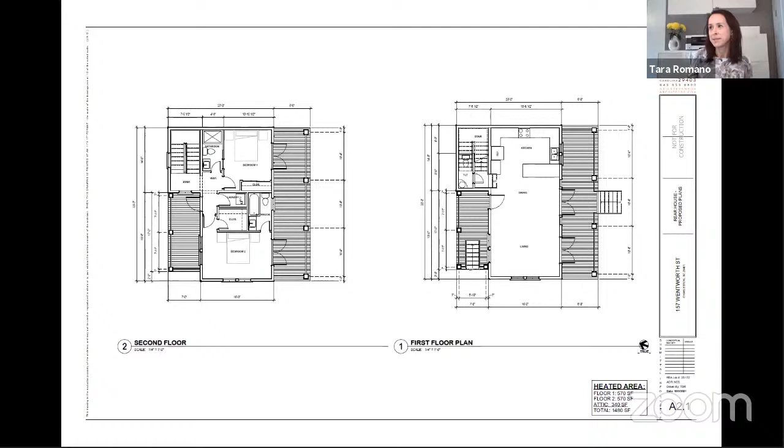These are the floor plans - basic living areas on the first floor, 2 bedrooms on the second floor, and then attic space on the 3rd level, which is a half level.

And just to close it, we've met with and received a lot of positive feedback from the immediate neighbors here. We've also had numerous meetings with the neighborhood association, BAR staff, and historic groups. We started this with a 3-story building, larger footprint house, and it's evolved into a smaller building along the way based on feedback and collaboration. Again, this house is 152 foot back from Wentworth Street and is mostly hidden by other structures. The owner is excited to bring this property back to life, and the overall improvements he feels are going to be of good benefit to the neighborhood.

Thank you, Ms. Romano. Do my fellow board members have any questions at this time?

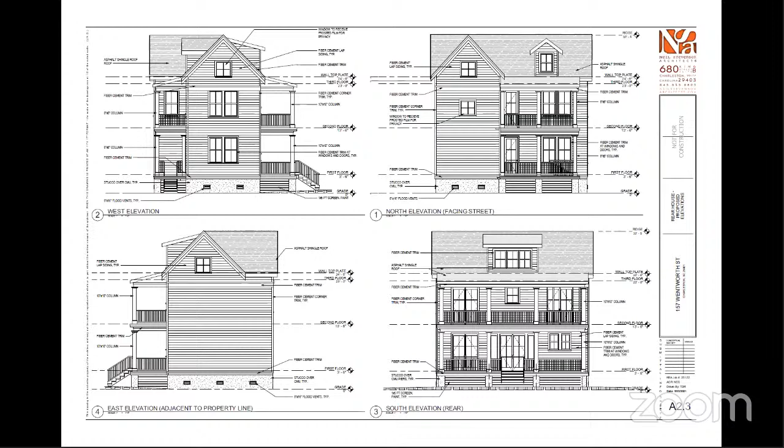We also have some letters. The first is from the Harleston Village Association. Dear members of BAR, we have reviewed the application for the construction of a new single-family residence at the rear of the property at 157 Wentworth Street, an important 1853 Greek Revival masonry residence in our neighborhood.

We look forward to the applicant moving forward with its restoration with hopes that the piazzas will be reopened or developed in a more sensitive enclosure. We appreciate the efforts of the owner and architect as we see the scale of the new building has been reduced and upper porches and decks were removed with the latest design. However, the new site section shows a building whose height, scale, mass, and overall design direction warrant further study.

Please consider the following points. We feel that the new building is still incongruous with the main house and existing historic structures on the property. Relative to scale, the building is taller than the dependency directly adjacent to it due to its third floor. Stylistically, it appears that the current design shares no details and takes no inspiration from the historic structures on the property. The new building does not relate to the main house in the hierarchy of form traditionally found with dependency structures throughout Harleston Village, making it conspicuously out of place.

We would like the board to pay special attention to the south facade. This side will be the most publicly visible part of the structure, which will be easily viewed from Beaufain Street. As for the land plan, we suggest that the brick apron continue to the corner of the main structure to further contain the gravel parking area. We would also like to see space for a landscaped area at the base of the new structure rather than bringing the gravel up to the foundation wall.

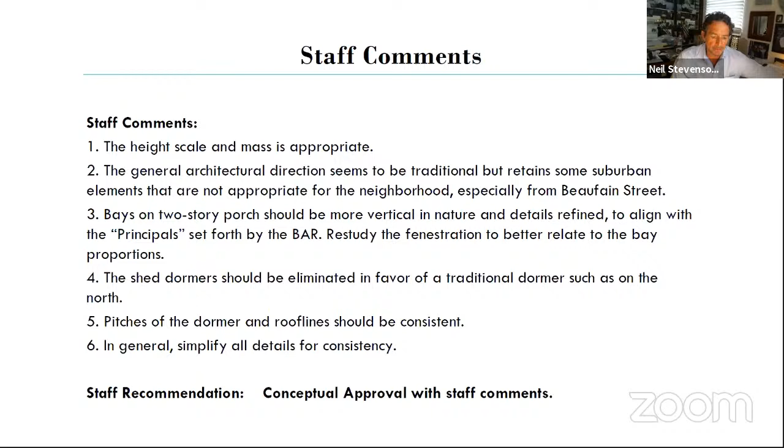We did try to move this a little further back from the carriage house. As Tara said, the carriage house is challenging as far as trying to keep the subservience. So the subservience really is based on the massing of the main house, which we've gone over and over. I think we're getting close.

I agree with the Historic Charleston Foundation's suggestions of maybe reducing that gable and doing something more. I don't think a shed roof is necessarily out of place here. I think that offers some benefits, and if you look in this neighborhood, there are many examples of shed dormers.

So I would disagree with that, as far as I don't know if that rear house should be completely a replica of what's going on in front of it. The styles are already different, and the house to our east, which this board has approved, is drastically different from the house behind it. To set different standards for us would not be quite fair.

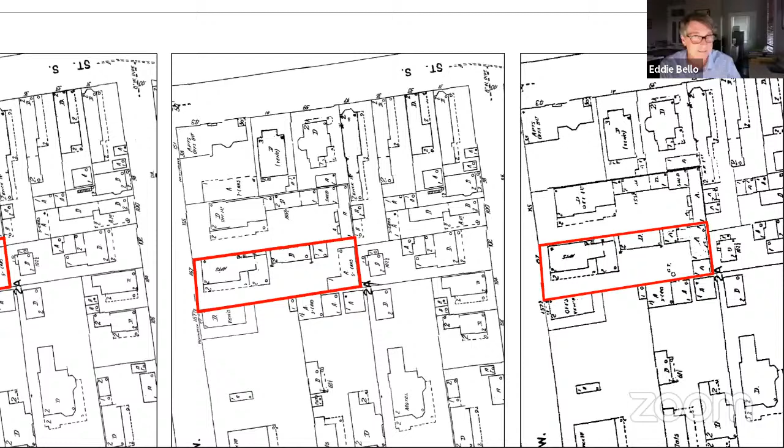All right, so we have a motion on the floor for conceptual approval of height, scale, and mass and general architectural direction. I'll second. Kim, did you get the rest of that motion? I did - with further architectural detailing per board comments and consideration of materials. Does that sound good, Eddie? Yes, I apologize for it being so long. And I apologize, who provided a second to that motion? Bill, and I apologize for cutting you off, Lindsay. So a lot of apologies all around. You were just excited, so I understand. And hungry.

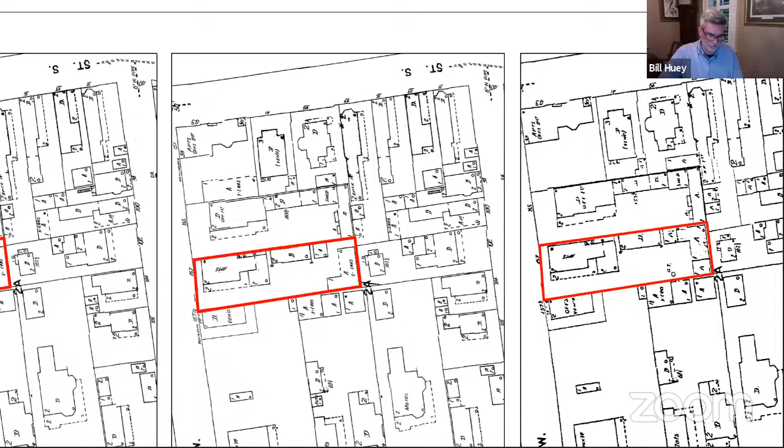I will put it to a vote. Hunter? Yay, in favor. Julia? I'm going to abstain on this one. Eddie? Yay, in favor. Bill? Yay, in favor. Chair votes with the majority. And with that, the motion passes with 4 voting for and 1 abstention.

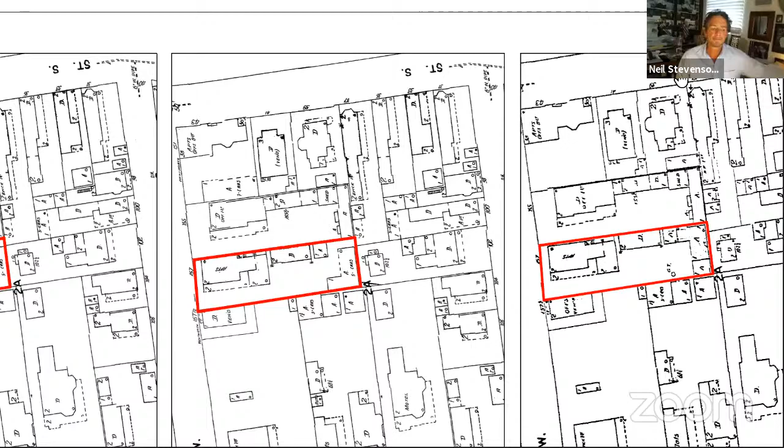Thank you. Thank y'all, thanks guys, thank you, have a good night. Eddie and Hunter, thanks for jumping in tonight, it's nice to have you guys both here. Yeah, it was good to do that once. I like it, I'll see y'all in 6 months. Yeah, likewise.